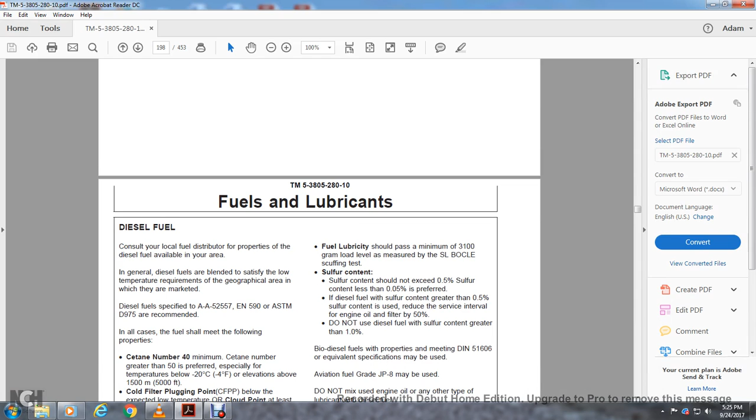Diesel fuel: consult your local fuel distributor for the proper diesel fuel available in the area, with general diesel fuel blending satisfying the low temperature requirements of the geographical area in which they market diesel fuel, specified with AA 52557, EN 590, ASTM D975. It is recommended that in all cases the fuel should also meet the following.

Property for cetane number: 40 minimum, cetane number greater than 50 is preferred, especially for temperatures below negative 4 degrees Fahrenheit and elevations above 5,000 feet. Cold filter plugging point, or CFPP, should be below the expected low temperature; the cloud point should be at least 9 degrees Fahrenheit below the expected low temperature.

Fuel lubrication: the lubricity should pass the minimum of 3,100 gram load level, measured by the SLBOCLE scuffing test.

Sulfur content should not exceed 0.5%; sulfur content less than 5/100 of a percent is preferred. If the diesel has sulfur content greater than 0.5%, you have to reduce the service intervals for engine oil and filter by 50%. Do not use diesel fuel with sulfur content greater than 1%.

Biodiesel fuels meeting the DIN 51606 equivalent specification may be used. Aviation fuel grade JP8 may also be used. Do not mix used engine oil or any other type of lubricant with the diesel fuel.

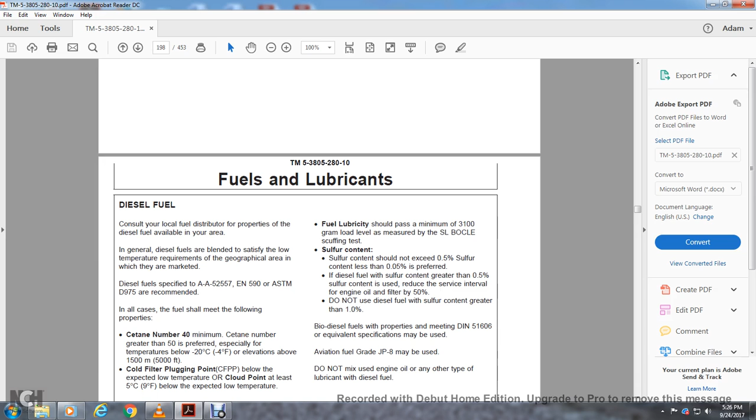Alright, lubricity of the diesel fuel. Diesel fuel must have adequate lubricity to ensure the proper operation and durability of fuel injection system components.

Diesel fuel highway use in the United States and Canada now require sulfur content less than 0.05%. The diesel fuel in the European Union requires sulfur content less than 0.05% as of October 1996. Experience shows some low-sulfur diesel fuels may have inadequate lubricity; their use may result in reduced fuel injection performance due to inadequate lubrication of the injection pump components, due to lower concentration of aromatic compounds.

These fuels can adversely affect injection pump seals and may result in leaks. Use of low lubricity diesel fuel can also cause accelerated wear, injection nozzle erosion and corrosion, engine speed instability, hard starting, lower power, and engine smoke.

Fuel lubricity should be a minimum of 3,100 grams load level, measured by the SLBOCLE scuffing test. AA 52557, ASTM D975, and EN 590 specifications do not require the fuel to pass fuel lubricity tests.

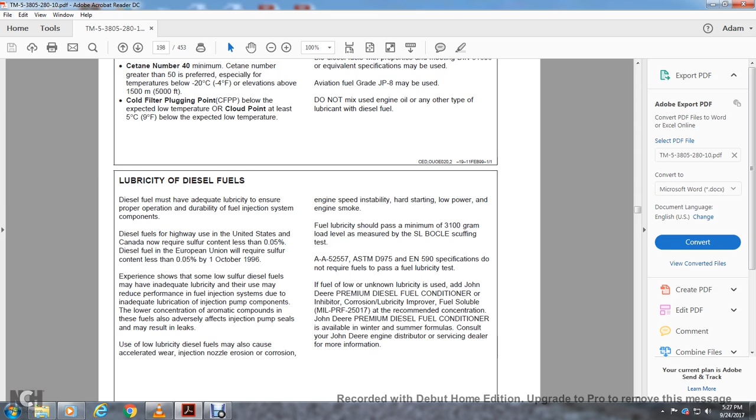For fuel of unknown lubricity, use John Deere Premium Diesel Fuel Conditioner, a corrosion inhibitor and lubricity improver, fuel soluble, meeting military specification MIL-PRF-25017, at the recommended concentration. John Deere Premium Diesel Fuel Conditioner is available in winter and summer formulas. Consult your John Deere engine distributor or dealer for more information.

Alright, low sulfur diesel fuel conditioner. For engines used off-highway with existing fuel formulas, the fuel will not require additives to provide good engine performance and reliability.

However, many fuel distributors will not carry both low and regular sulfur diesel fuel. Where only low sulfur fuel is available, a corrosion inhibitor and lubricity improver, fuel soluble, should be added at the recommended concentration.

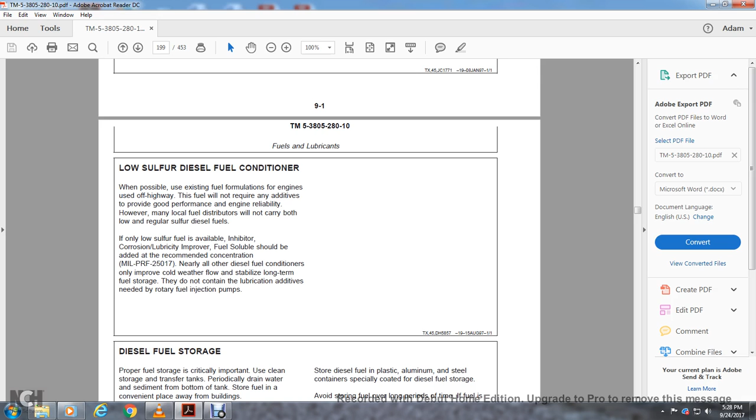Per MIL-PRF-25017, nearly all other diesel fuel conditioners only improve cold weather flow and stabilize long-term fuel storage. They do not contain the lubrication additives needed for rotary fuel injection pumps.

Alright, diesel fuel storage. Proper fuel storage is critically important. Use clean storage and transfer tanks, periodically draining water and sediment from the bottom of the tank.

Store fuel in a convenient place away from buildings. But importantly, do not store diesel fuel in a galvanized container.

Diesel fuel stored in a galvanized container reacts with the zinc coating to form zinc flakes. If the fuel is contaminated with water, the zinc and fuel will also form a gel, and the flakes will quickly plug the fuel filters and damage the injection nozzles and injection pump.

Do not use brass-coated containers for fuel storage, as brass alloy contains copper and zinc which can react with the fuel. Diesel fuel can be stored in plastic, aluminum, or specially coated steel containers.

Avoid storing fuel over long periods of time if it is stored for more than a month prior to use.

There is a slow turnover of the fuel tank of the supply tank of the fuel conditioner, such as the John Deere Premium Diesel Fuel Conditioner, meeting the MIL S 53021 specification, stabilizing fuel and preventing microbial growth in the fuel. It is available in winter and summer formulas. The conditioner also reduces fuel gel and controls wax separation during cold weather.

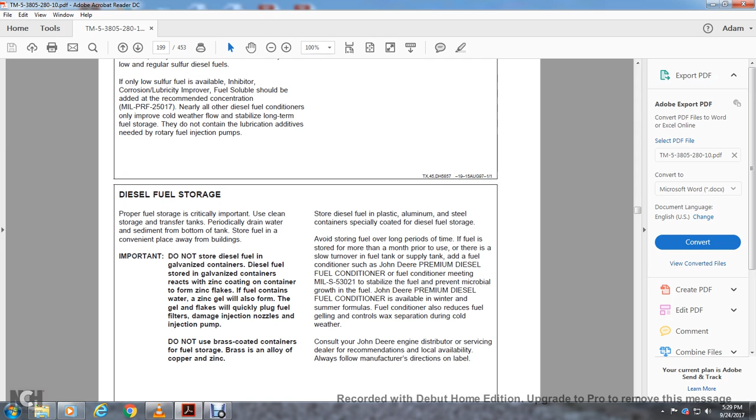Consult the John Deere engine distributor or servicing dealer for recommendations on local availability, following the manufacturer directive on the label for your fuel tank. Caution: handle carefully if the engine is running or hot. Do not fill the fuel tank, and do not smoke while filling the fuel tank or working on the fuel system.

To avoid condensation, fill the fuel tank at the end of each day's operation. The fuel tank capacity is 560 liters, or 148 gallons.

Do not use galvanized containers. Important: diesel fuel reacts with the zinc coating on galvanized containers, and the zinc flakes combined with water in the fuel form gel flakes, which will quickly plug fuel filters and damage fuel injectors and fuel pumps. Do not use galvanized containers to store diesel fuel. Store fuel in plastic containers, aluminum containers, or specially coated steel containers made for diesel fuel. Do not use brass-coated containers, as brass is an alloy with copper and zinc.

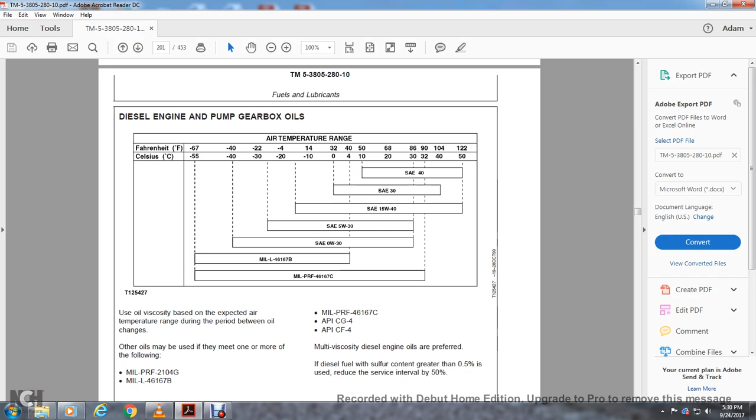For the diesel engine and pump gearbox oil, use viscosity based on Fahrenheit and Celsius air temperature ranges: SAE 40, SAE 30, SAE 15W40, SAE 5W30, SAE 0W30, meeting MIL-PRF-2104G or MIL-L-46167B, MIL-PRF-46167C. Use the viscosity based on the expected air temperature range during the period between oil changes. Other oils must meet one or more of the following: MIL-PRF-2104G, MIL-L-46167B, MIL-PRF-46167C, API CG-4, and API CF-4, with multi-viscosity diesel engine oils preferred.

Diesel fuel with sulfur content greater than 0.5% should reduce the service interval by 50%.

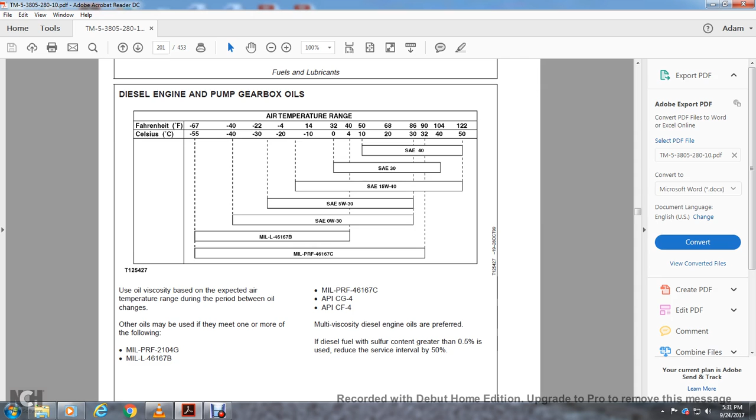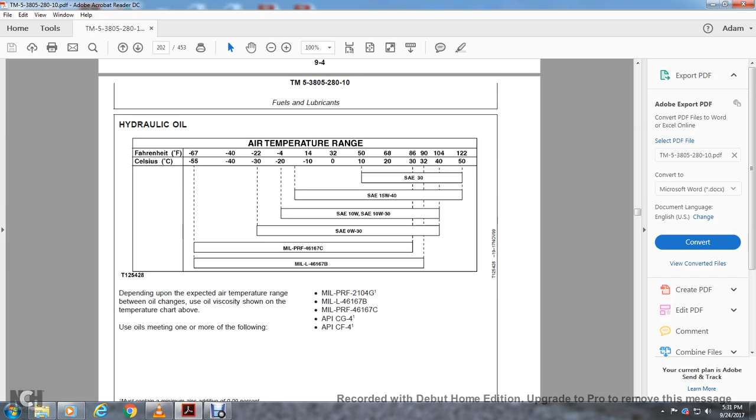For hydraulic oil, use viscosity based on Fahrenheit and Celsius air temperature: SAE 30, SAE 15W40, SAE 10W, SAE 10W30, SAE 0W30, meeting MIL-PRF-46167C or MIL-L-46167B. Depending on the expected temperature range, select viscosity as shown in the temperature chart above. Oils should meet one or more of the following: MIL-PRF-2104G, MIL-L-46167B, MIL-PRF-46167C, API CG-4, API CF-4.

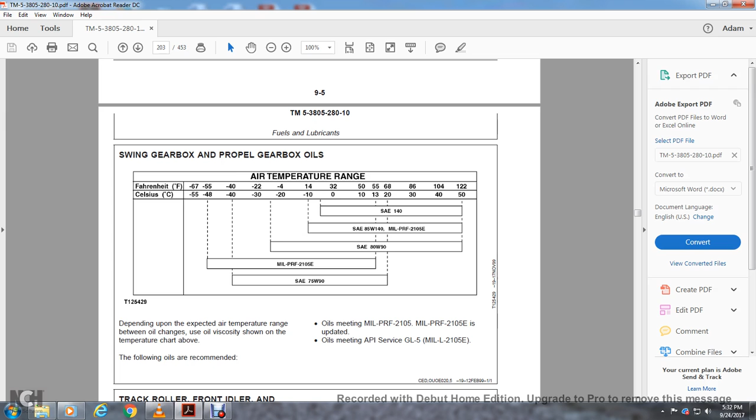For the swing gearbox and propel gearbox, use viscosity based on Fahrenheit and Celsius air temperature: SAE 140, SAE 85W140 meeting MIL-PRF-2105E; SAE 80W90 meeting MIL-PRF-2105E; and SAE 75W90. Depending on the expected air temperature range, select viscosity as shown in the temperature chart above. Recommended oils meet MIL-PRF-2105E or updated to API service GL-5, MIL-L-2105E.

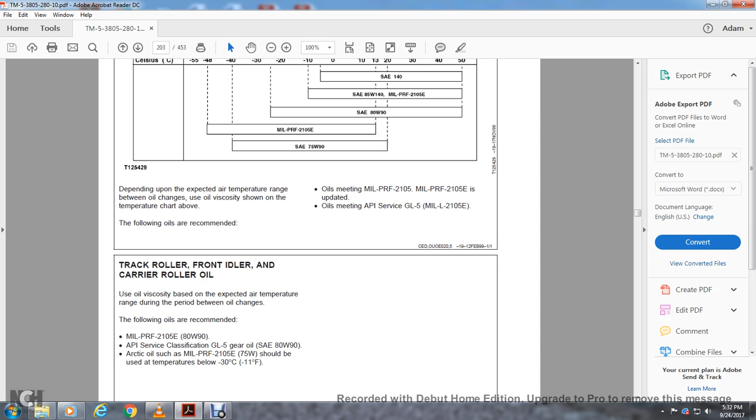For the track roller, front idler, and carrier roller oil, use viscosity depending on the expected air temperature range during the oil change period. Recommended oils are MIL-PRF-2105E, SAE 80W90, API service classification GL-5 gear oil, or SAE 80W90. Arctic oil meeting MIL-PRF-2105E, SAE 75W, should be used at temperatures below negative 11 degrees Fahrenheit.

For the track adjuster, working tool pivots, and swing bearing grease, use viscosity based on Fahrenheit and Celsius air temperature range: NLGI number 2, NLGI number 1, NLGI number 0, and NLGI number 00 for special Arctic conditions. Select grease based on the NLGI consistency number expected for the temperature range during service intervals.

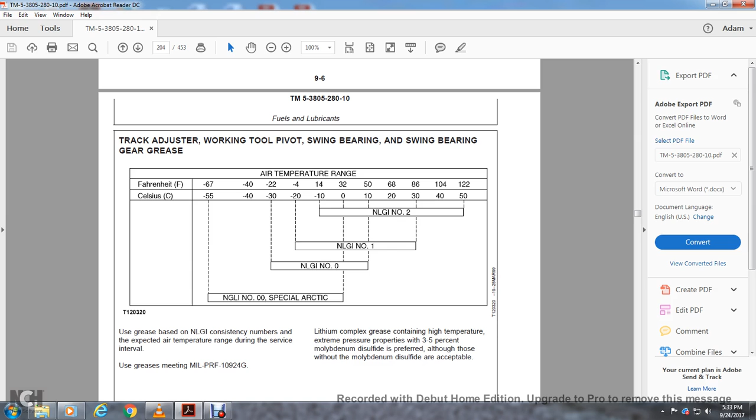Use grease meeting MIL-PRF-10924G, a lithium complex grease with high temperature and extreme pressure properties. 3 to 5% molybdenum disulfide is preferred, although grease without molybdenum disulfide is also acceptable.

Oil filters: filtration is critical to proper lubrication and operation. Always change the filter as required and specified in the manual. Use filters meeting John Deere performance specifications.

Hydraulic circuit. Oil ISO VG32. When stabilized, anti-wear additive specification viscosity at 40 degrees Celsius, 30 to 33 cSt. Viscosity index greater than or equal to 150. Pour point less than negative 40 degrees Celsius. De-airing less than or equal to 5 mn performance.

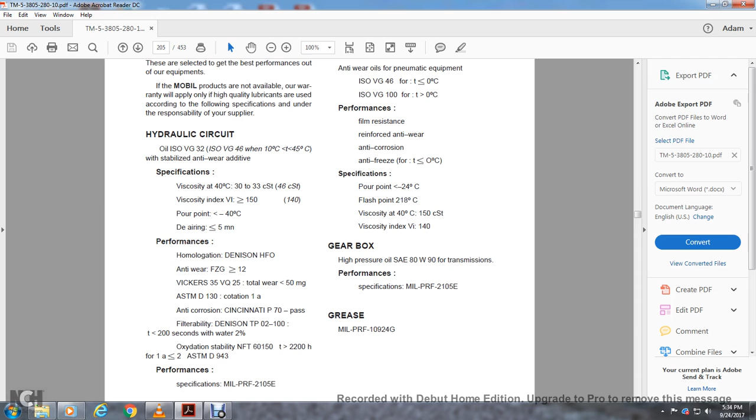Performance specification MIL-PRF-2105E. Pneumatic circuit anti-wear oil for the pneumatic equipment. ISO VG46 for T less than or equal to 0 degrees Celsius. ISO VG100 for T is

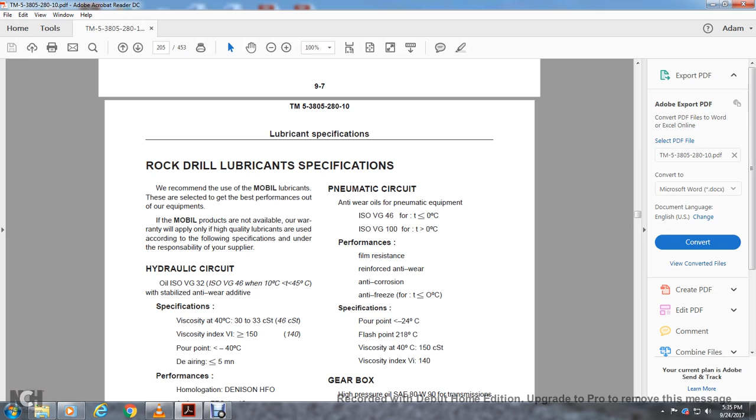Greater than 0 degrees Celsius. Film resistance reinforced performance, film resistance, reinforced, anti-wear, anti-corrosion, anti-freezing specification. Pour point less than negative 24 degrees Celsius, flash point 218 degrees Celsius, viscosity at 40 degrees Celsius of 150 CSTs. Viscosity index VI 140, gearbox.

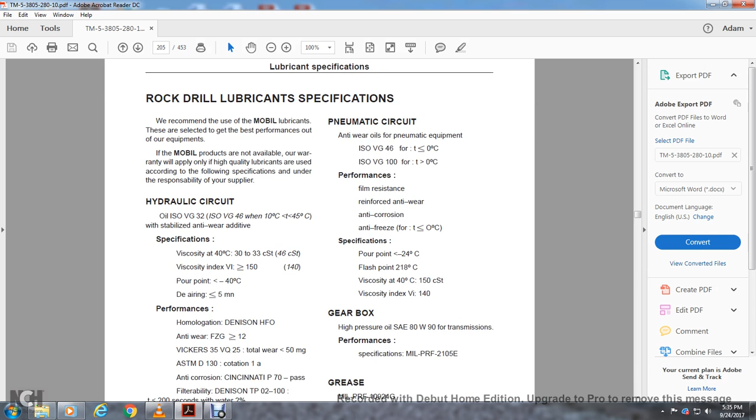The high pressure SAE 80W90 for the transmission performance specifications. Mil PRF 2105E grease. MIL-PRF-10924G.

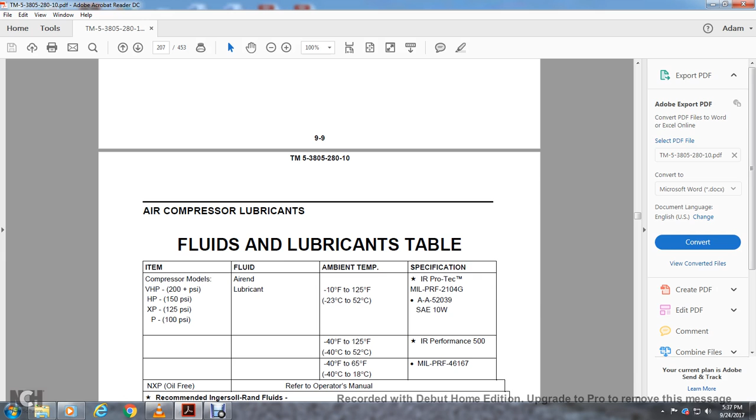Ambient temperature from negative 40 to 125 degrees Fahrenheit, IR performance specification 500, negative 40 degrees Fahrenheit to 65 degrees Fahrenheit, MIL-PRF-46167.

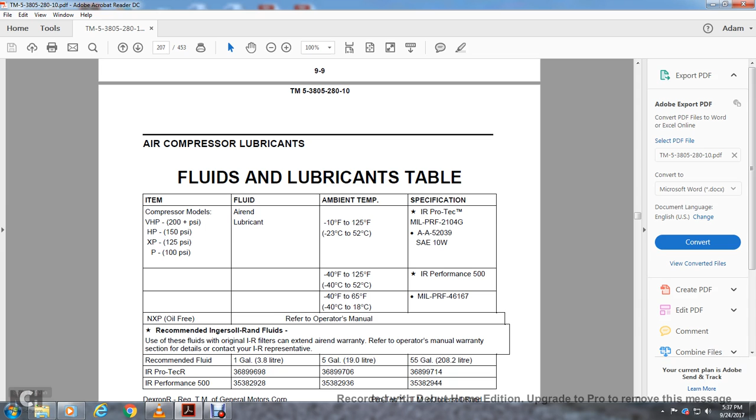NXP oil free, refer to operator's manual recommendation. Ingersoll Rand fluids: use the fluid with the IR filter that can extend the air end warranty. Refer to the operator's manual for warranty details, or contact the IR representative. Recommended fluid available in 1 gallon, 5 gallon, and 55 gallon. IR Pro-Tec, for parts and service contact your distributor, call 1-800-633-5206.

Lubrication storage: your equipment can operate at top efficiency only with clean lubricants. Use clean containers to handle lubricants whenever possible. Store lubricants and containers protected from dust and moisture and other contaminants to avoid water and dirt accumulation. Make certain all containers are properly marked and identified with their contents. Properly dispose of old containers and any residual lubricant they may contain.

Alternative and synthetic lubricants in certain geographical areas may require different lubricating recommendations than those printed in this manual. Some John Deere brand coolants and lubricants may not be available in all locations - consult your John Deere dealer to obtain information and recommendations. Synthetic lubricants may be used if they meet the performance requirements shown in the manual. Temperature limits and service intervals shown in this manual apply to both conventional and synthetic oils. Re-refined base stock products may be used if the finished lubricant meets the performance requirements.

Avoid mixing lubricants of different brands or types. Oil manufacturers blend additives so that oils meet certain specifications for performance requirements; mixing different oils can interfere with the proper function of the additives. For lubricating performance, consult with your John Deere dealer to obtain specific information and recommendations.

Factory initial fill lubrication: the acceptable air temperature range for initial fill lubricants are as follows. Engines: negative 25 degrees Celsius to 45 degrees Celsius. Pump gearbox: negative 25 degrees Celsius to 56 degrees Celsius. Hydraulic oil: negative 29 degrees Celsius to 50 degrees Celsius. Swing and propel gearbox: negative 20 degrees Celsius to 50 degrees Celsius.